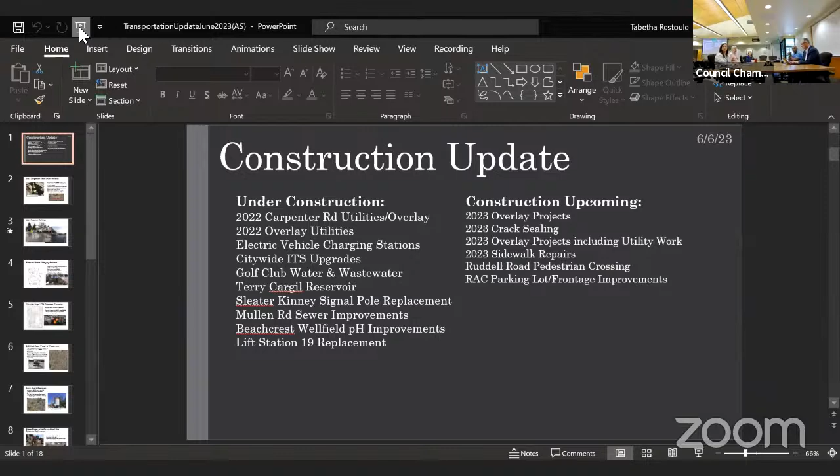It's been a few months since we've had a construction update, so we have some projects in here that are larger utility projects in addition to mainly transportation, just for your awareness.

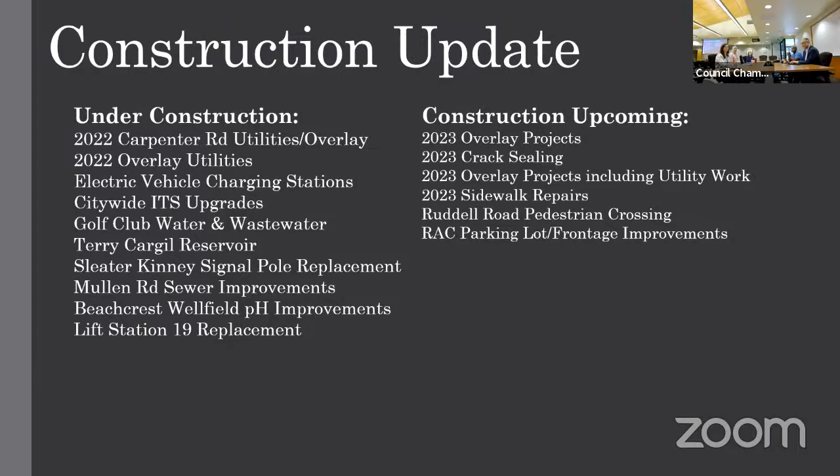Let's start with the 2022 Carpenter Road improvements. This project includes installation of 4,100 linear feet of water main and street reconstruction, awarded to Miles Resources and funded by the TBD and the water utility. The water main installation is complete at this point, with temporary patching on the roadway. As soon as school is dismissed at the end of the month, they are able to continue with repaving the street, scheduled beginning July 6th, July 7th at this point and forward.

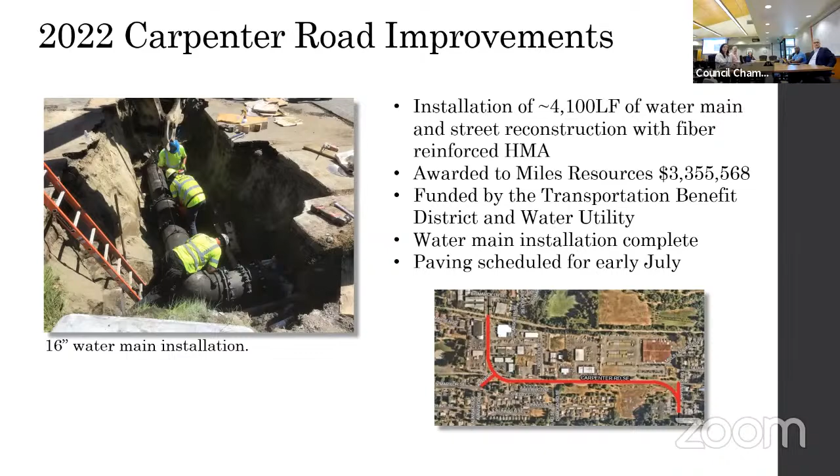The 2022 overlay utilities project includes 3 areas: the 7th and Golf Club area in the business district, Franz Street, and 14th Avenue Southeast between Sleater Kinney and College Street. That also includes about 2,000 linear feet of water main and street reconstruction, also awarded to Miles Resources and funded by the TBD and the water utility.

Work is complete in this section around 7th Avenue and 14th Avenue, with the exception of permanent striping. They're waiting on the HMA to cure fully before that is completed. We have the remaining water work on Franz Street upcoming on Saturday, June 10th.

That was originally designed as a live tap water connection to minimize disruption, but it is prohibitive with the amount of room that's available in that trench. So we had to move to a cut-in tee, which will result in turning off water for the customers over here, including Lacey Fire District 3.

Is that in conjunction with the City of Olympia, or is that not? That's just us. Following completion of that water work, upcoming next weekend, we can pave Franz Street as well, and that'll be complete midsummer this year.

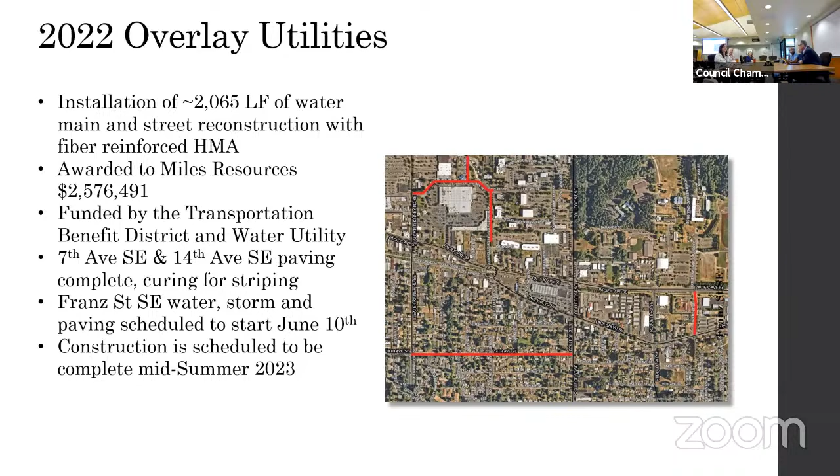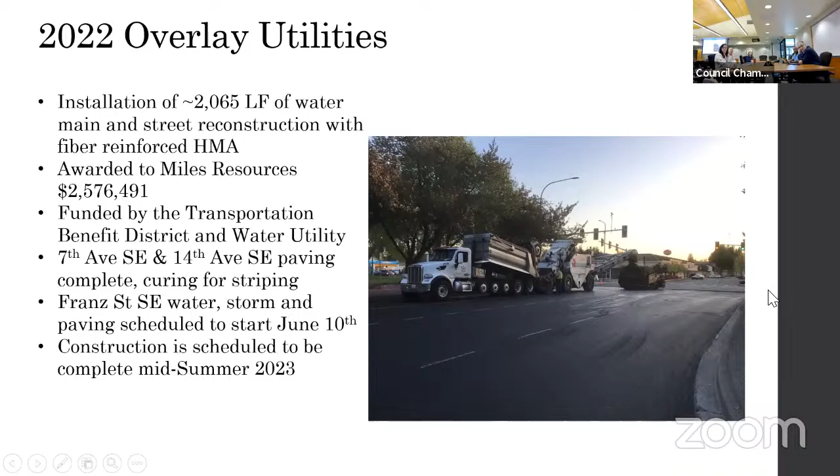This is a shot on 7th and Sleater Kinney of the paving. This is where that cut-in tee will be occurring on June 10th. This is Lacey Boulevard shown here in Franz Street, kind of out into that lane. 7th and Sleater Kinney, is that completed? Correct, except for striping. Yes.

The electric vehicle charging stations, I included in here for an update. This is a total project cost of around $673,000 with a federal grant supporting the majority of that, $516,000. At this point, the site work is complete at all locations: the community center, library, city hall, and the North Thurston Public School District office. We are just waiting on the service cabinets for that final electrical connection, and those are expected any day. So we're waiting on a start date, likely this month, for them to complete that work.

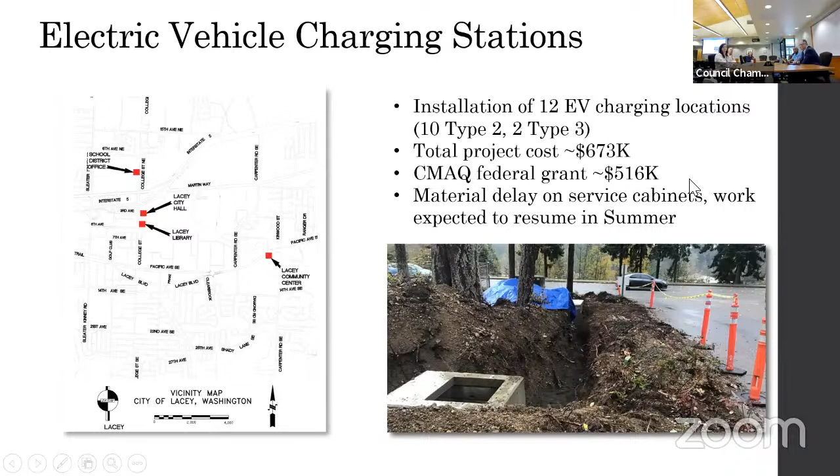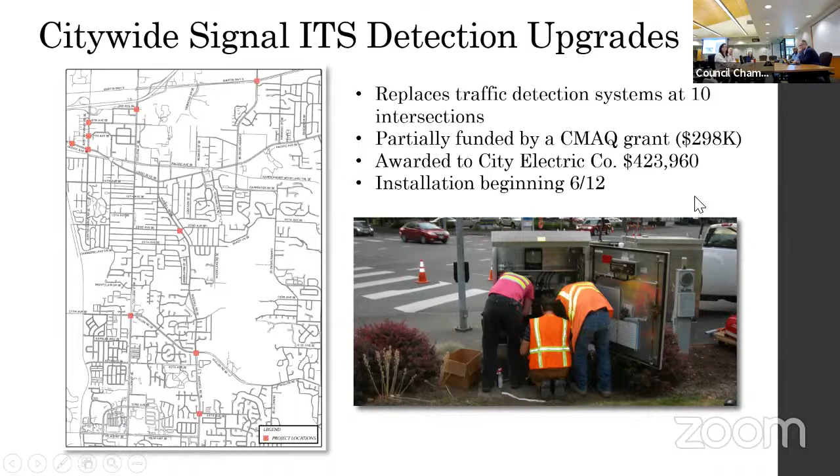Golf Club Road Water and Wastewater has just started. This project includes 3,800 linear feet of water main, 2,000 linear feet of sewer force main, and 4,000 linear feet of sewer gravity main. It's primarily Golf Club Road, but also includes this section of Lacey Boulevard before the one-way couplet and the roundabout at Pacific and Golf Club.

There's also a sewer connection in the intersection here at Sleater Kinney that we have an upcoming road closure for. That was awarded to SCI in the amount of $6,562,091. All of the work from Sleater Kinney through the roundabout in this section is scheduled for night work, and then we'll move down Golf Club Road.

That's right in front of the new MultiCare, or is that? Correct, the new MultiCare is right here in this section of the roundabout. Is that a part of the reason why we are upgrading sewer there? No, it's just an infrastructure upgrade. It's very old in that area.

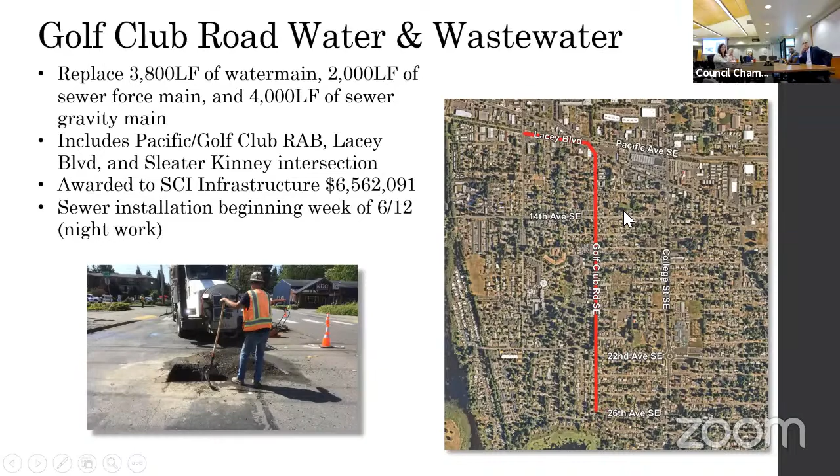Terry Cargil Reservoir is located on Intelco Loop and was awarded to Phoenix Fabricators. At this point, all 10 rings have been poured, and they're beginning material delivery for the steel bowl on the remainder of the reservoir. That project is scheduled to be completed in the beginning of next year.

So that's the base before you start the actual tower. For some reason I thought this was the taller tower essentially. Yeah.

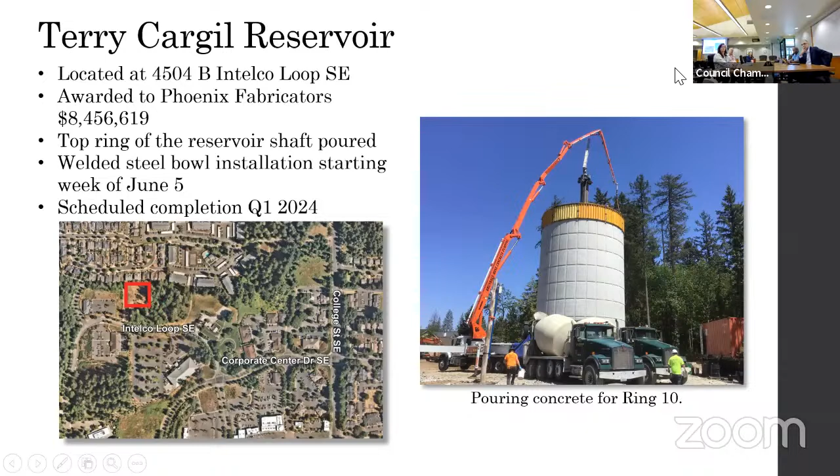Sleater Kinney and Pacific signal pole relocation. This is to move the traffic signal pole at the intersection of Pacific and Sleater Kinney behind the sidewalk, since it's been an issue with accidents. The foundation has been poured, and it has a 30-day concrete cure, then they'll schedule the closure of that intersection for the remaining work.

The 61.5 only represents our construction cost, not the upfront cost. That's just the contract. Do you remember what we paid for the right-of-way? I don't, but it's not much.

WashDOT gave us the signal pole when they took it down for the DDI. We took that one and modified it to put in this space. It's not like a cell phone tower where we have to continually pay an annual portion - they gave it to us one-time, for free, for the pole. We bought the space outright. So we're repurposing it - the whole recycle, reuse, repurpose thing. That's awesome.

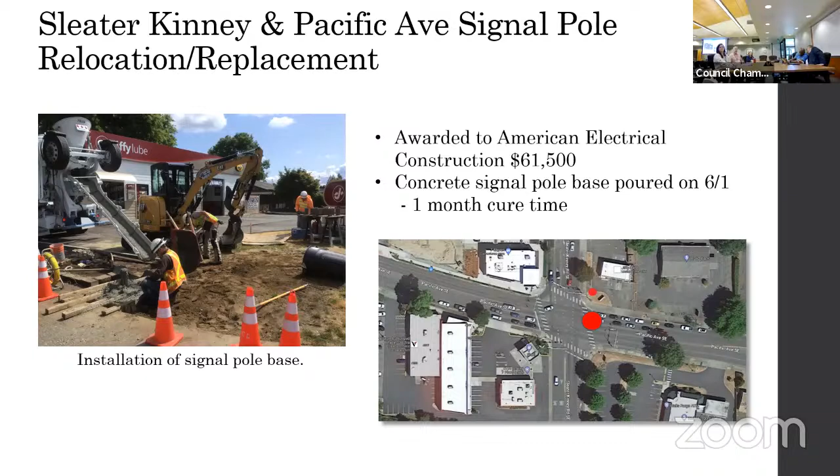Moving on to 2023 Mullen Road sewer improvements. This includes about 2,000 linear feet of sewer force main.

Wait, what's the completion on this signal pole? Potentially this summer.

There's some minor water valve removal and replacement, including a few hydrants, and street reconstruction as well. This includes the section of Mullen Road up to Afflerbaugh and east of Carpenter Road. That was awarded to Miles Resources. The sewer installation is about 30% complete, and paving is projected for July this summer, to be complete before the end of summer.

Is that the railroad trestle there, to the far right? Yeah, right here. Okay, and so that's correct.

Beachcrest Wellfield pH improvements started in the last few months as well. This was awarded to McClure and Sons.

Wait, hold on, we have to go back to Mullen Road for a minute - I'll need a copy of this. So Mullen Road, Miles got that. And the city limit stops at Afflerbaugh, right? I believe so, just a little over - that's about where the red line stops. So we're setting up a connection there for the developer to pick up the rest of the way, to make the remaining improvements.

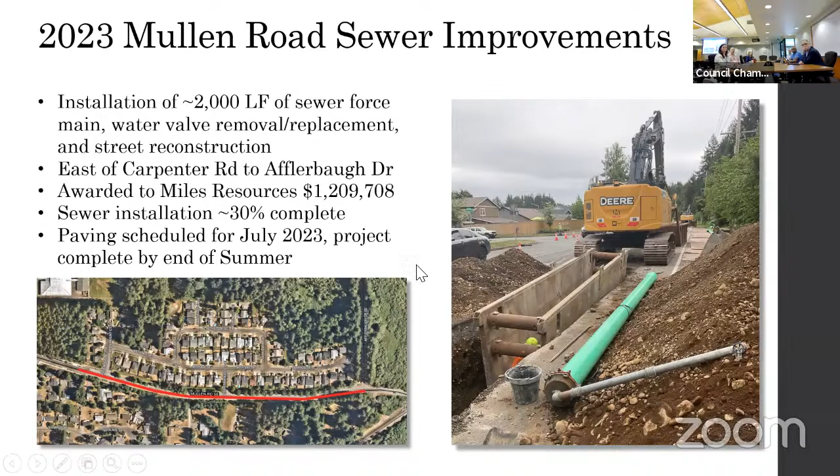All set? Yep, I'm ready. I'm good. I'm ready for the next one.

Beachcrest Wellfield pH improvements was awarded to McClure and Sons. This includes pH adjustments in compliance with Department of Health requirements. At this point, all the wells on the site are offline. Well 15 is decommissioned, and 15R and 16 are offline until the end of next year, so the site is essentially de-energized. They are moving forward with the stem wall for the new pH treatment building and will be putting in rough-in plumbing and electrical in early July.

Now those wells are supposed to be back online in the spring, right? It's currently scheduled for fall of 2024 to have those back online.

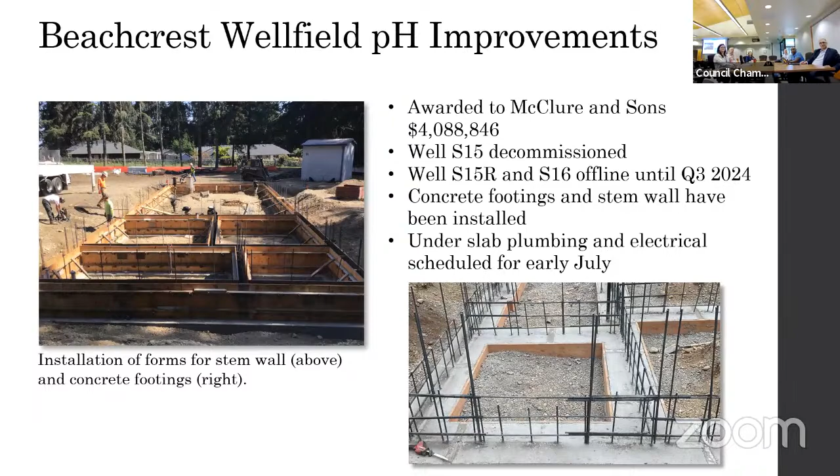Lift Station 19 replacement is underway. They've completed the sewer connections along Willamette Drive and patched those areas temporarily until completion of the project. They're currently working to restore irrigation along Willamette Drive. There's a large section that was disrupted for some of those manholes that were installed.

We've been fielding calls from the HOAs in particular that own that irrigation system, and the planting there may potentially have to be restored. Now, is that where the new townhouses are going in? I saw the closure one day. There are two projects side by side on Willamette Drive. One is the private development further north, and this one is just past that on the southern end of Willamette Drive, fairly close to Shipwreck Beach.

Where this is located, up there at 31st, there's an apartment project going in at that intersection, on the northeast corner, which is that roundabout. That's where we talked about those townhomes because they have a common wall, but they're still for sale, and that's just past the 31st project. And so this is a separate project from that one.

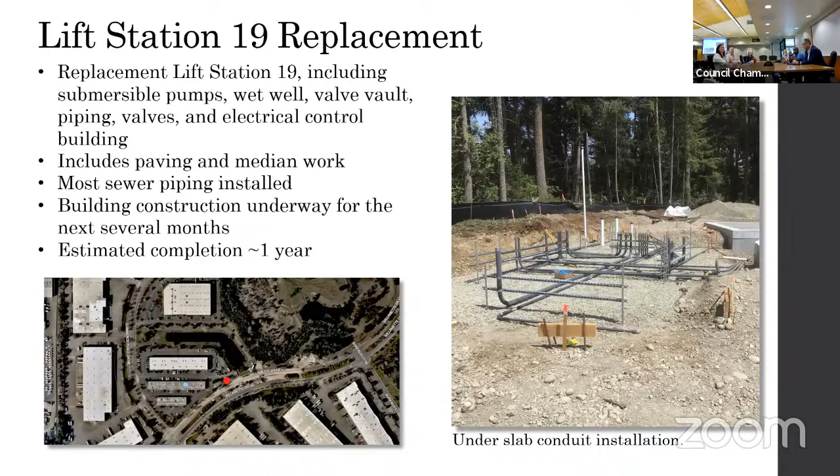So most of the work at this point is on the new lift station site, and that estimated completion is about 1 year.

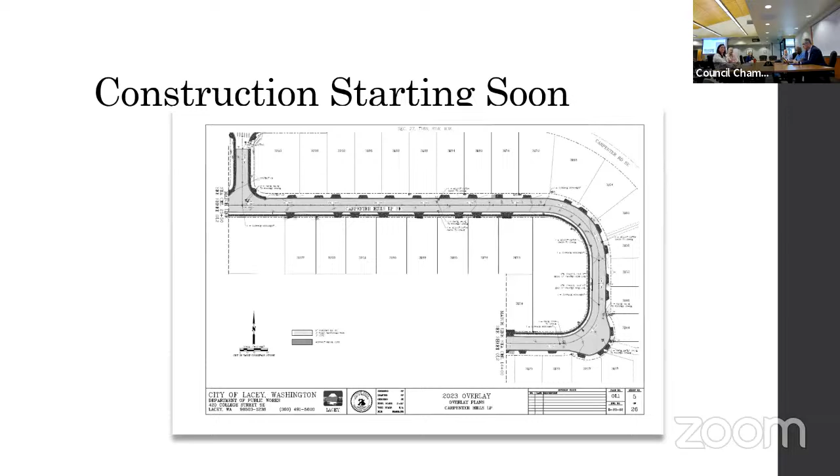Moving into projects that are starting construction soon: we'll be awarding the 2023 overlay phase 1 at June 15th council to Tucci and Sons. This project includes Carpenter Hills Loop, 34th Avenue Southeast, Gem Streets, a portion, and primarily Rainier Road and 66th, including that roundabout.

This is funded by the Transportation Benefit District, and construction is scheduled for this summer.

Is the Rainier Road 66th Avenue section where we had the water damage? The emergency repair limits start at the end of where we're picking this up and go to the trestle. Yes, that was the section.

Can I just go over there real quick? This right here, that's the backside of the golf course, correct. And then that's where the old Lacey substation, the little police station, was at for the longest time. Okay, so we're hitting that part. Yep, just checking to make sure.

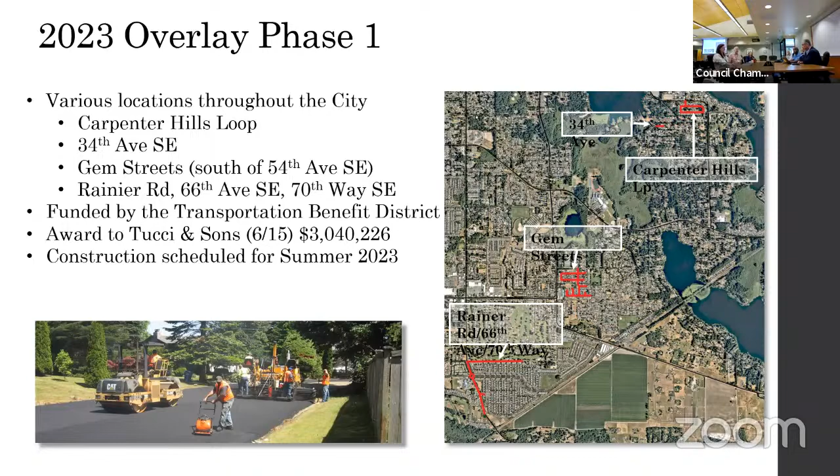Overlay phase 2 includes the roundabouts at Britton Parkway and Gateway Boulevard, and the roundabouts at Pacific Avenue and Homann. This is also funded by the Transportation Benefit District, estimated at $1.5 million. We've pushed this project to advertise towards the end of the year versus trying to complete it before the paving window ends this summer, considering the impact of these two corridors. So we anticipate construction to begin in early spring 2024.

I guess it doesn't go down far enough. In my mind, I'm thinking why not just wait until the new roundabout is about to be RFP'd, but... over Carpenter, Britton, yeah I guess. Anyway, sometimes we think of Britton and it's like wait a minute, we're repaving that, it feels so new already, right? Does it not? Or is that just me, because I live on it?

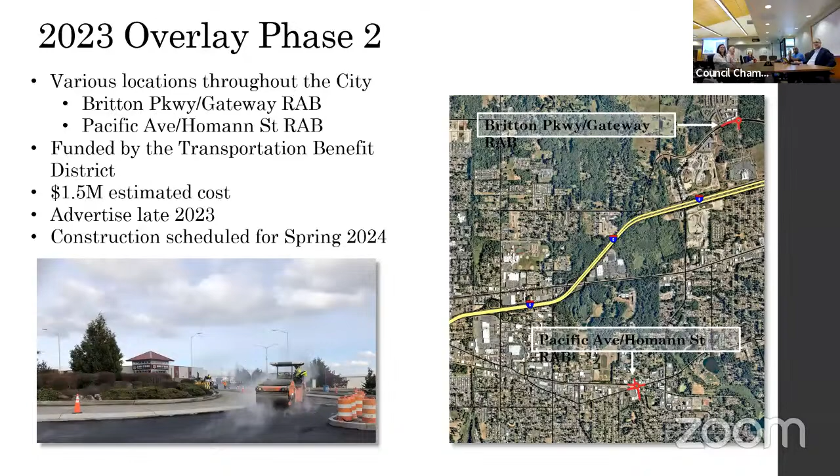It feels new, but the condition doesn't reflect that. It's over 20 years old. So it's seen a lifespan. It really hurts my feelings when we're redoing things that I did - it didn't seem like 20 years ago, so thanks for bringing that up.

The 2023 overlay phase 3 includes utility work as well, in 3 locations: a section of 37th Avenue, 36th Avenue Southeast with the cul-de-sacs, and 33rd Avenue and 33rd Loop. This is funded in partnership between the TBD and the water utility with the proportionate amounts shown here. This one is scheduled for advertisement around the same time, towards the end of this year.

That's strictly residential back there. There's no issue, correct.

When we do those kind of things, we notify residents - get your car off the street, we're going to do something. Do we ever have any pushback on that, or any problems? No, we usually get some concerned phone calls, just looking for information more than anything, but we send out a mailer prior to beginning construction and are active posting on social media, news releases and things. Goes pretty smooth most often.

If we go back just real quick - oops, sorry - let's try to make sure that we're out of here for lunch.

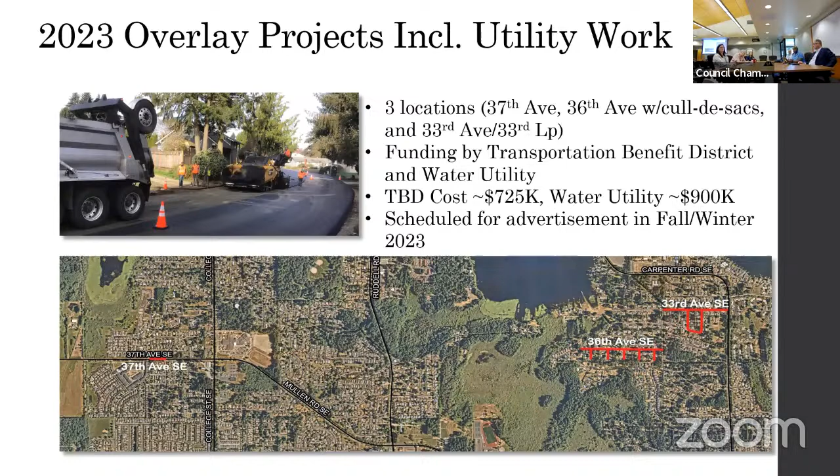TBD is also funding $500,000 for sidewalk repair. Locations identified for this year include Ruddell Park at 33rd Court Southeast, and 45th Avenue Southeast from the College Street Roundabout out to the trail. Advertisement is scheduled for this winter, which is the most advantageous time for replanting trees and also to get a good product on the concrete replacement.

Is it because they're slow in terms of work? Ideally, we would get these out in early spring, but at this point in the year, we're setting the contractor up to be doing this work in the middle of winter as it is. So we're going to push that out into the spring and set it up for success.

We keep a lot of families' food on the table. Yeah, keep them working. And then 45th.

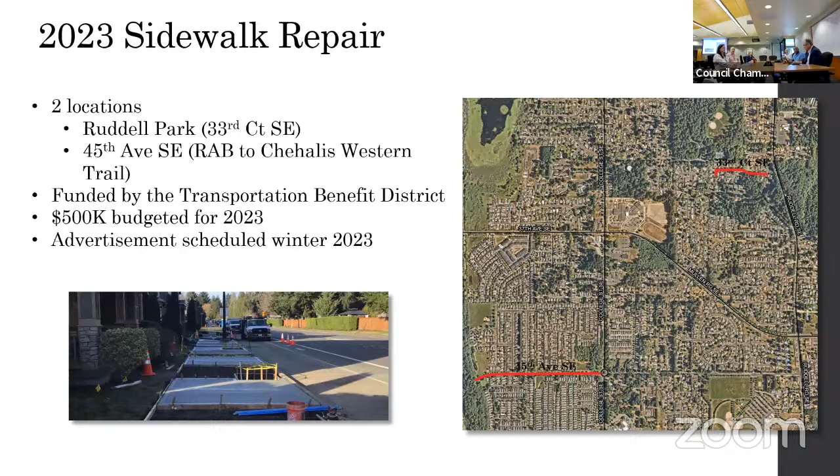Ruddell Road pedestrian crossing is part of the annual program for pedestrian and bicycle improvements. That is to install a pedestrian crossing on Ruddell Road just north of Hazelwood Lane, shown here. That advertisement is tentative for this fall at around $100,000.

All right, so the one on Ruddell is where again? I'm sorry, north of Hazelwood, near Faith Lutheran church. That's the church right here.

Is there going to be a pedestrian crossing, or is there already one? There is not. We haven't listed this one yet. It's by the new retaining wall - we couldn't get the right of way in time, so we were going to bid it with the retaining wall project. Is it going to be a signal crossing or just flashing beacons? So that's new, yes.

There's currently no pedestrian crossing in that area, not till you get to 22nd. At every intersection, they take their risks.

Hey, real quick on that crosswalk - do we get any grant funding for that, or is it strictly out of our pocket? Strictly out of our pocket. That's what I thought - small projects like that don't really go well with grants. It takes a lot of extra time and a lot of extra money for no apparent reason.

I knew the answer, I just had to - couldn't help myself.

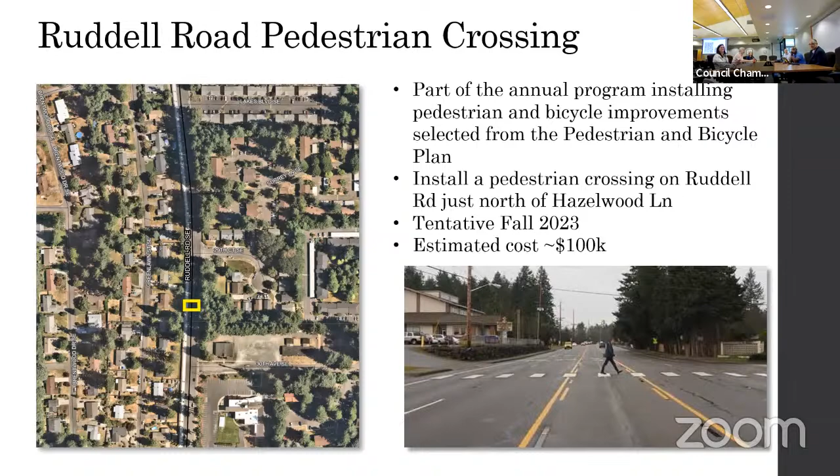All right, the RAC parking lot was budgeted and scheduled for construction this summer. Quick update - that parking lot improvement includes 338 regular stalls plus 8 bus stalls, which do not currently exist. We've also included the annual program to install electric vehicle chargers here at this site.

Bus stalls - yes, so shown here we have 8 bus pullouts. Do we have any bus stalls anywhere else in the city that you know of? So this is kind of a milestone. Are we officially like a big city now? We get some - high schools have bus stops. We get that pullout - medium-sized city.

The idea here, Mark, is to prevent the current practice of pulling into the roundabout to do drop-offs with teams and things, and instead do that here in the plaza area.

Oh sure, okay, leave the roundabout open - gotcha. So just so I can orientate myself - we have Steilacoom Road here, that's Steilacoom, and Marvin Road here.

Take a left on Steilacoom, then a right into our entrance here, and you'd pull into this entrance to park the team buses or whatever. Then there'd be an exit point here to go back out.

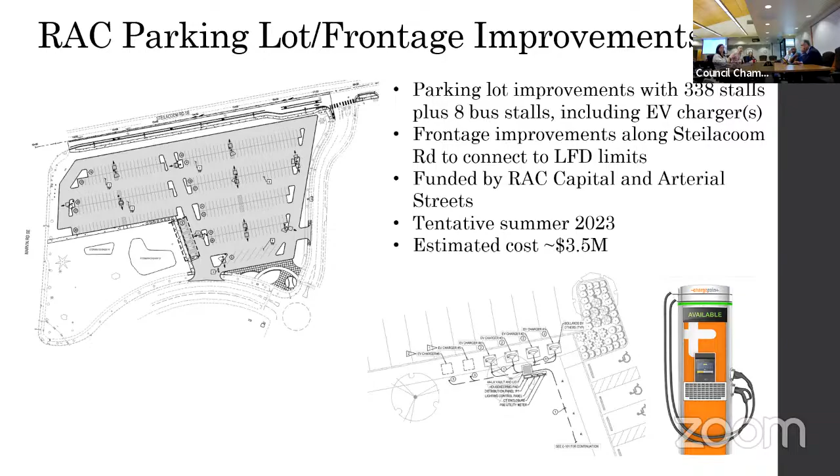That's the end of my presentation. What project was it that we were having — EV chargers at City Hall? That was city one, so that was TRPC CMAQ funding, and that has all the federal strings attached to it. So it's almost more efficient not to use it — a lot of the times, yeah, we think carefully about that before we apply for a grant.

So just so I have a full understanding, the RFP for that will go out in July. We are currently scheduled to advertise in July pending land use approval. And if we get it, we'll maybe start work this winter. That job is a 6 to 8 month job, should be complete by next summer if we can stay on that schedule.

That's contingent on material delays. Light poles, for instance, are approximately 9 months currently. Cameras could be a year, so those components may drag it out. But we could complete it without cameras, right? Yes. And if we had to, could we finish it without light poles, or would we not do that?

We'd surely open it up after there's pavement and striping. It just wouldn't be lit. Because we're not just going to let a nice full new parking lot sit - they park there now in gravel without lights anyway. Just checking. But some people like to have that nice smooth new asphalt undisturbed for a while. Stunt riders - yeah, I know those guys.

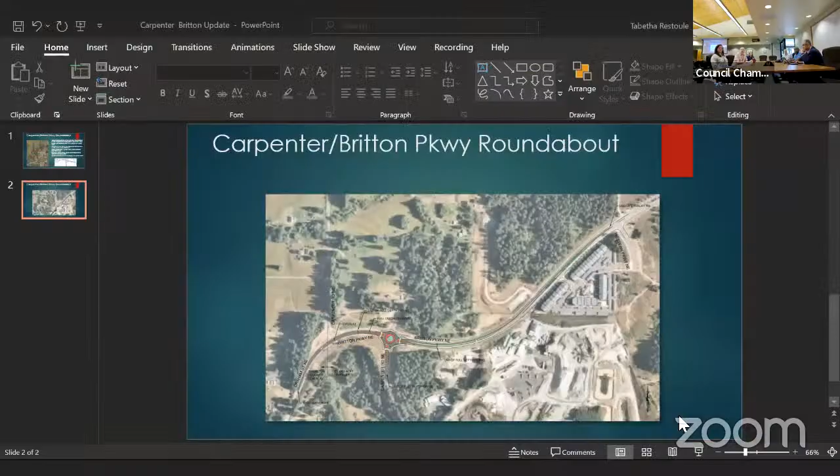I see the mouse, I can't- there you go, that helps. Okay, this is the slide that you saw in March. Can you share screen? Remote attendees, it's not sharing. Can you minimize that for a second? Right click. Okay, go down to the Zoom. On the right, your other right. Zoom, right there. I can't see that far. Click that and then go up and click share screen. No, presentation. How about now?

Okay, so we're building a single lane roundabout at Carpenter and Britton, and that can be easily expanded once the bridge gets widened on Carpenter Road. That was kind of our intent - we didn't expect the county to be widening 15th anytime soon, and we didn't expect Carpenter to be widened anytime soon. So we thought it better to do a temporary single lane roundabout that can be compatible with a future expansion. We have that all laid out.

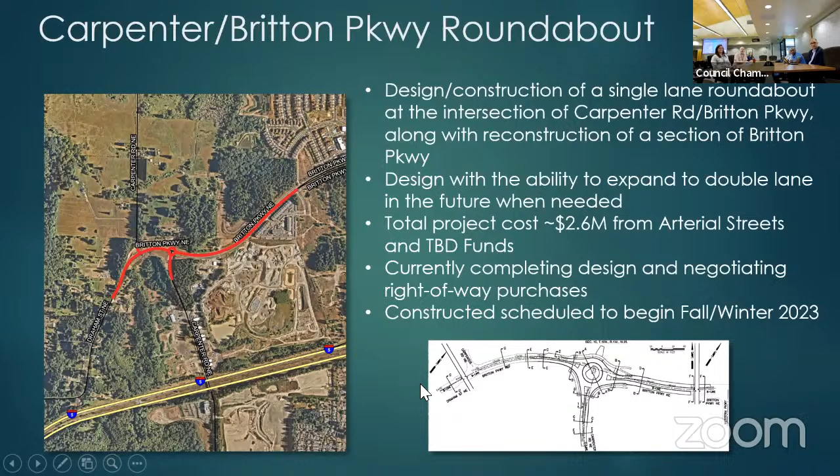As far as the parkway park, we added a sewer line to come from the roundabout, and we're stubbing it to Carpenter Road so they can connect to it and bring it down the hill. It's part of the project when we were working on it - that was when the requirement was that the bathrooms had to have sewer. So we're extending the sewer line to go to Carpenter Road so they can connect to it right about in here somewhere. There's already a sewer line in this section of Carpenter that goes down to the lift station down here. So we'll just pick that up and bring it down to about here, and then they could connect to it and bring it down the hill to the bathrooms.

So let me ask you this, the sewer line from Carpenter to the lift station - how many days of work do you think that was? I know it was already there, but I'm wondering how long it took. It was pretty deep. Like, how many days, a good month? That's a good 30 days worth of work, I think that's fair. Some of that ballpark, yeah. I remember that project, my mind thinks it took about that while. But that stuff has no relevance to what we're doing here today.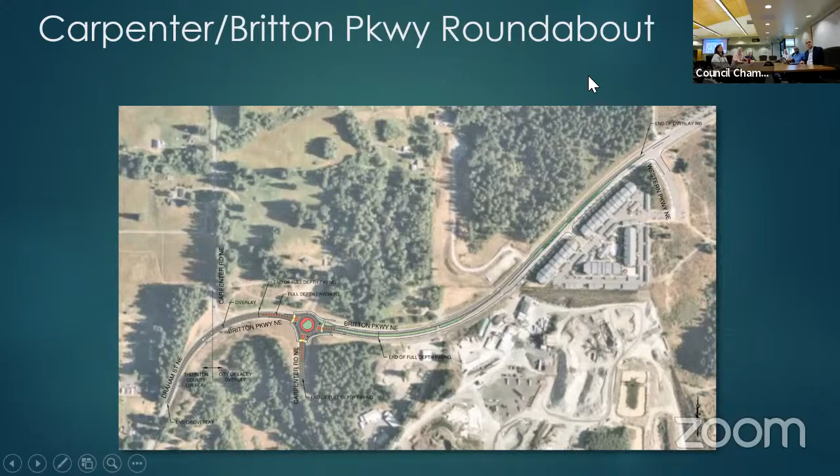Sure, this is new, there you go. My allergies are just killing me. Sorry. No worries, no, I'm excited for that Carpenter Road.

Carpenter and Britton Parkway - it's too bad the county's not as forward thinking and as responsible as they should be, but come November, there might be more forward thinking leadership there that can get that roundabout taken care of. They're doing what they can, I guess.

We just keep leading by good example and others will follow. I talked to one of the commissioners the other day and he said, Malcolm, we want to be more like Lacey. Yeah, there's a few things they do good that we take notice of too, but it's a good partnership so far.

It could have been better on this project. Well, we will keep doing everything we can. That thing was over 25 years ago and I remember it was a dollar issue for them.

It is what it is, and maybe when the Nisqually Reach and I-5 construction happens, we'll have to deal with the railroads and all that. Maybe we can revisit the trestle and get that mess taken care of that should have been handled 15 years ago. So we missed the train on that one again, it's all right. We just remember the past so we don't repeat it, I guess.